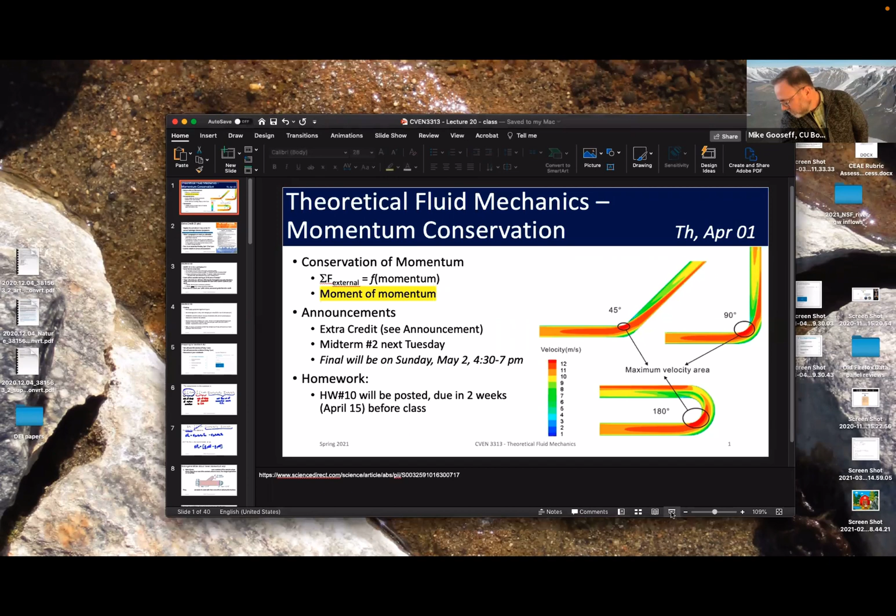Okay, so we're going to keep talking about linear momentum, the conservation of linear momentum, and then we will switch over to eventually talking about the conservation of the moments of momentum. So this is sort of getting into torque and stuff like that. We'll see if we get it started today, depends on how quickly we make it through the examples that I've got set up.

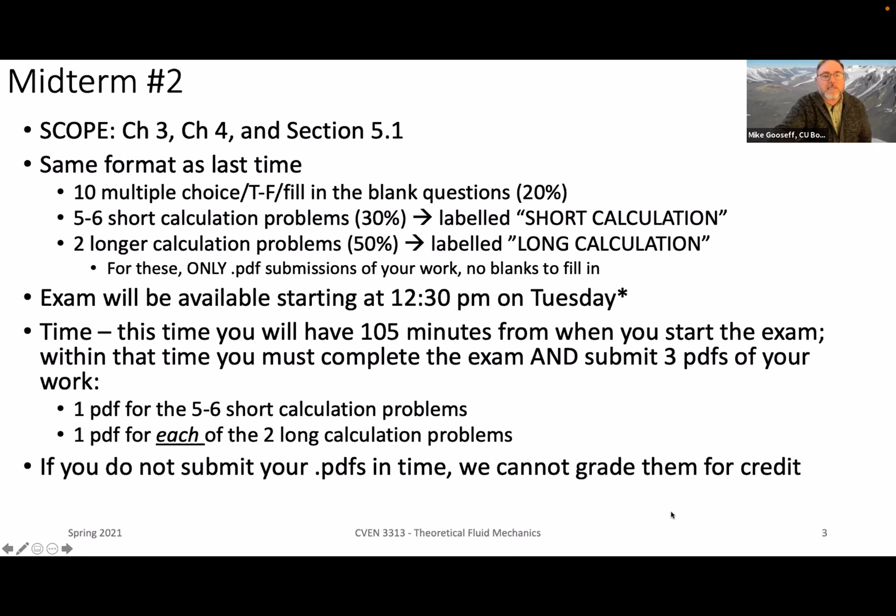So next slide then, grading. You must apply appropriate significant figures. We're going to be more stringent about that this time around.

We encourage you to carry units through your calculations, but that's not necessary—we won't take off if you don't, same as on the homework. However, if you get an incorrect answer because you didn't follow your units through, you'll lose points for the wrong answer, not extra points for missing units, but we may note that following units through could have helped. Just a heads up.

The work you provide needs to be orderly enough for us to follow your logic and process, but it's okay if you did something wrong, crossed it out, and kept moving. Please don't feel you need to take time to erase. We want you to be efficient with your time, but we also need to be able to review what you've done and follow your logic to see where things went wrong. Hopefully that saves you time.

This time we figured out how to hide the grades from you until grading is complete. Please don't worry about whatever number you see when you're done, because you may only see 20% of the exam score, since we have to hand grade about 70-80% of it—basically everything but those first 10 questions.

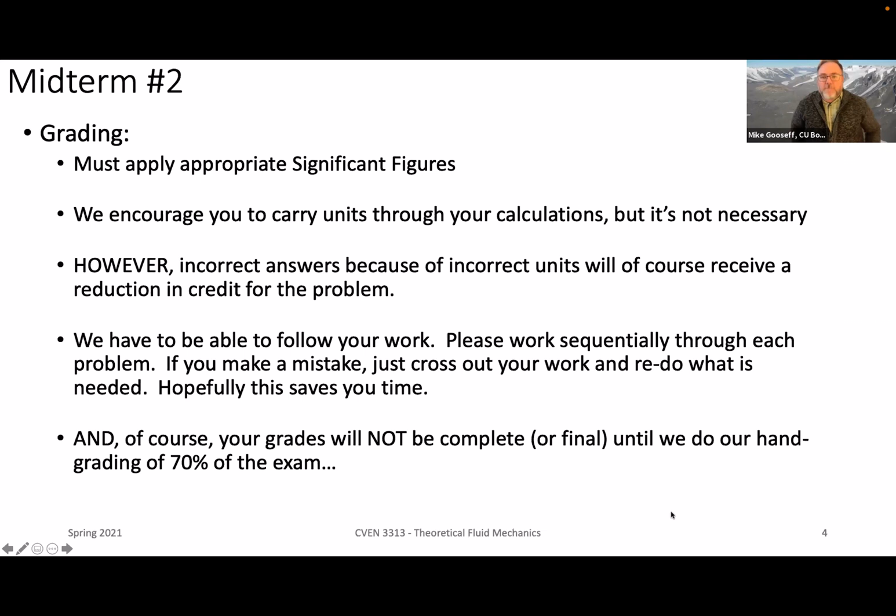All right, one last bit of information: how can you prepare for the exam? I'd recommend a couple of things.

I will post the solutions to all homeworks, including the one due today, by tomorrow at 5 p.m., so those will be available to you. Secondly, I'll post some practice problems tomorrow by 5 p.m. as well, much like we did last time.

Before I move on, I'll spend the recitation on Monday going over some of the longer problems in those practice problems. You can come with questions and we can have an exchange, but I can also just work out the problems I'm posting for tomorrow.

And finally, you've got a number of resources in your e-textbook. One of them is, when you're in a chapter reading—what the devil? Okay, sorry, this is weird. Oh, there we go. My pen was disappearing.

When you're in a chapter, on the left-hand side you can look at the library—it's kind of an index of everything in your book. You can go to these practice and homework problems, which are at the end of your chapter. Many have answers, and some have solutions worked out, so that can be a resource if you're stumped on how to solve a particular type of problem.

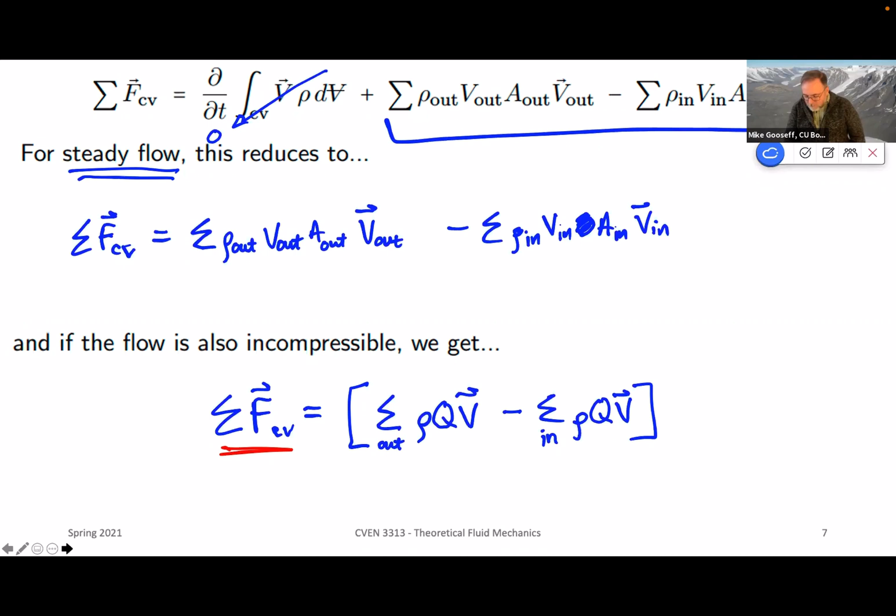Okay, so some generalities, rules, whatever, guidance—whatever you want to call this.

The first generality is when flow is uniformly distributed over a section of the control surface where flow into or out of the control volume occurs, the integral operations are simplified. What that means is that a particle here, a particle here, a particle here, they're all going at different velocity vector values.

This becomes more challenging to deal with than when all particles are going the same velocity, and our velocity vector is uniform across the cross section. So one-dimensional flows are easier to work with than non-uniform velocity distributions, and that's generally true for any problem. But with linear momentum in particular, it's quite helpful to have a single velocity vector representing the linear momentum at an inflow or outflow location.

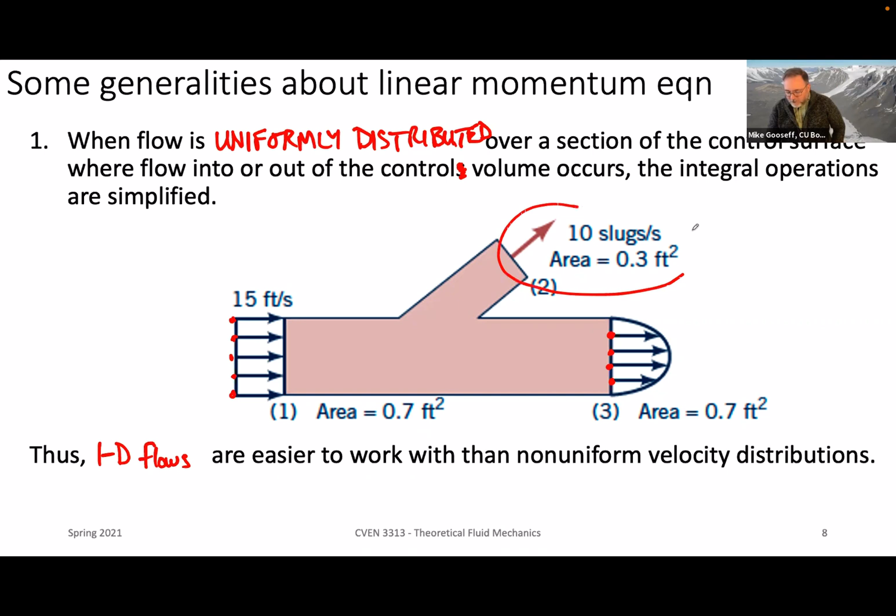It's interesting, we're actually given no information about this one. This was an example we looked at on Tuesday, or maybe last week, but in any event there was no information about it, so we assume we have uniform velocity across that cross section, leaving that location. So there's the first generality.

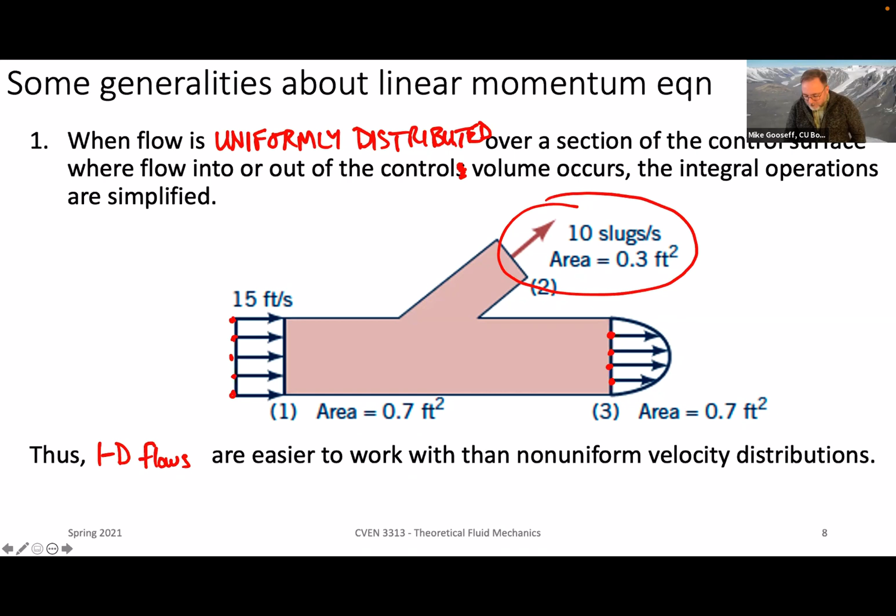The second one is that linear momentum is directional. It can have components in all three orthogonal coordinate directions. It can also be positive or negative depending on the particle's direction of travel.

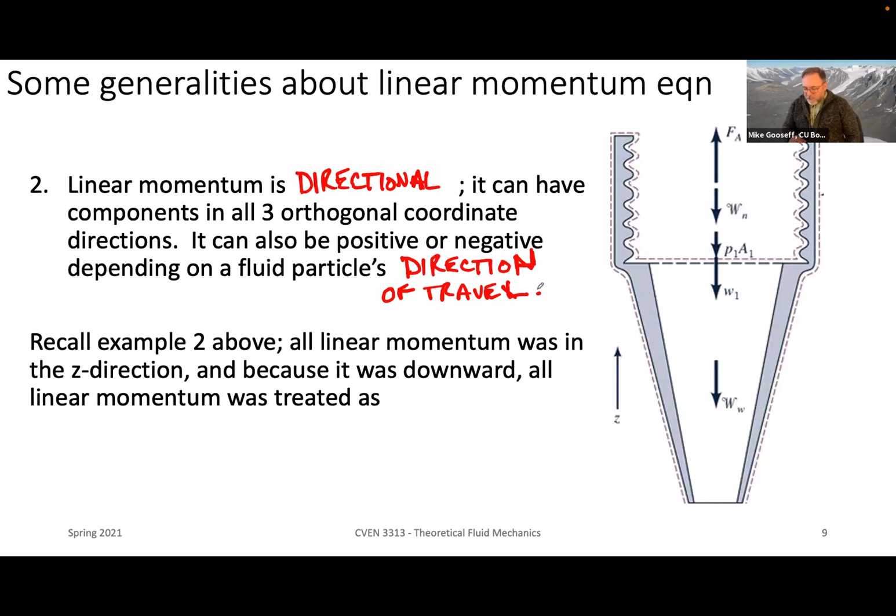Recall this nozzle problem that we worked on, example 2 on Tuesday. One of the things we talked about was that all of the flow was vertical, right? All of the velocities. So we have a W1 here, not shown here, but we had a W2 down here. Remember, those are going in the negative z direction.

So positive z is indicated to be upward, so any downward velocity is going in the negative z direction. Both W1 and W2 have different magnitudes, but they were going in the same direction, and they were both negative if we were summing or assessing momentum, linear momentum in the z direction. So all linear momentum was in the z direction, and because it was downward, both W1 and W2's linear momentum was treated as negative.

Now I'm saying that without putting it into the equation where we have to assess an inflow and an outflow of the control volume. This is just the direction of the linear momentum at the moment, at this particular junction.

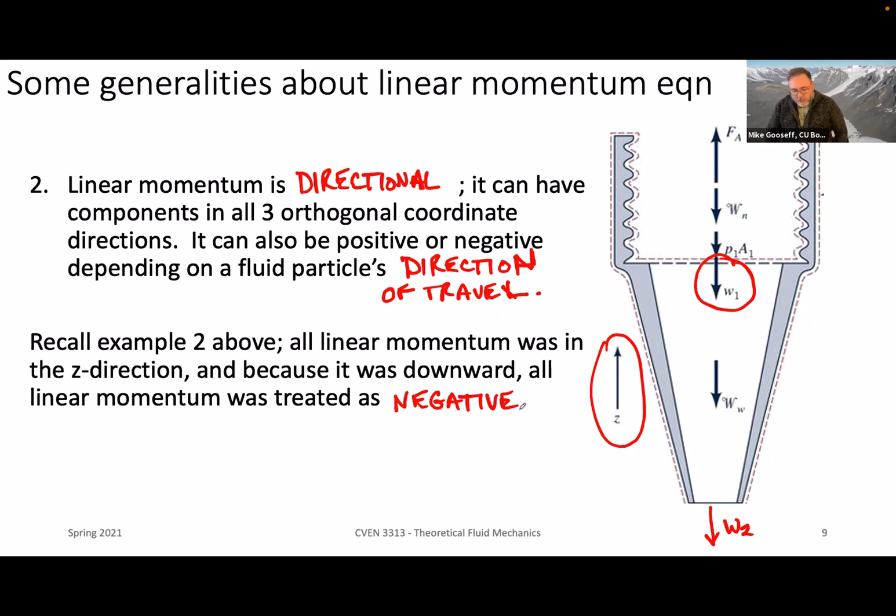Number 3, the next complication is that the flow of linear momentum into a control volume involves a negative V dot n hat dA. Remember, this is what we're integrating in that second term on the right-hand side of the Reynolds transport theorem that includes linear momentum. This piece will have a direction for V and a direction for n, for our n hat.

So the flow of linear momentum into a control volume involves a negative V dot n hat dA, and the flow out of a control volume involves a positive V dot n hat dA. And then we've got the velocity vector outside of that in its own direction. So note there are two signs to keep track of: the direction of the velocity vector, positive or negative, and whether the momentum is into (negative) or out of (positive) the control volume. We'll go through one or two examples of that in coming slides.

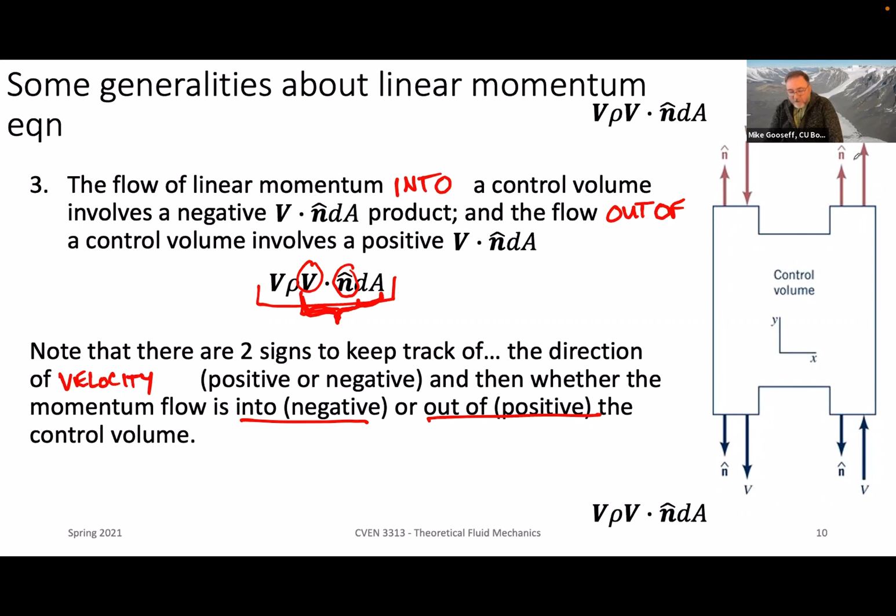So let's look at these four different cases right here. We have an inflow here, and of course our n hat is out, and then we have an outflow here of the control volume. On this upper end, n hat dA will be negative since it's an inflow, but V is going in the downward direction. As long as we think of Y as positive upward, two negatives multiplied together give us a positive here. On the other side, velocity is going in the positive y direction, and because this is an outflow, it will be positive as well, so this ends up also being positive.

For the same reason, but reversed, because it's an outflow and happens to be going upward in the y direction. Now what about these two down here? We have an outflow where V is going downward in the y direction, so that would be negative. Because it's an outflow and we're going with n hat, we would have a negative value down here.

Over on the right-hand side, this lower right-hand corner, now we have velocity going in a positive direction. And because that's an inflow, we know that should be negative, right? So we have a velocity going in the positive y direction, but because it's an inflow to the control volume, this is also negative. A negative times a positive gives us a negative.

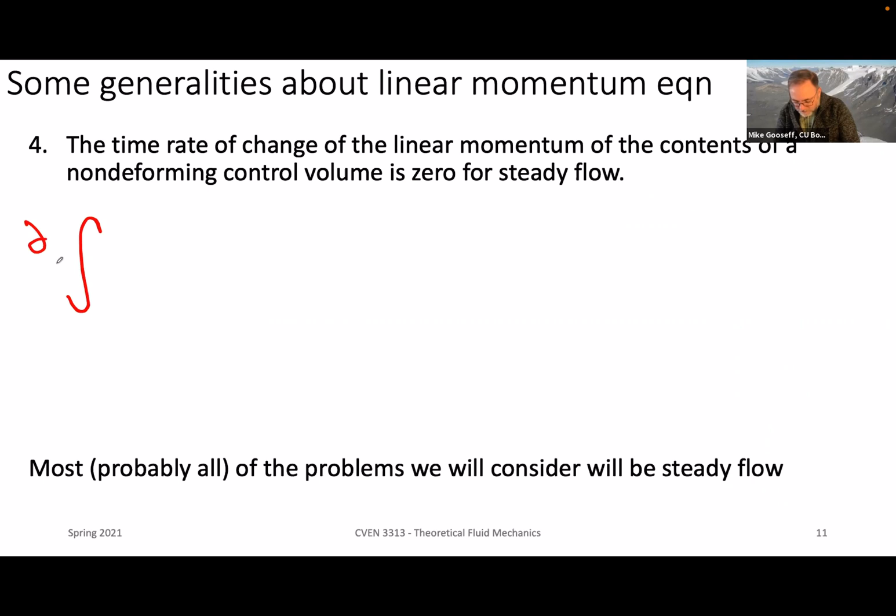Number 4: the time rate of change of the linear momentum of the contents of a non-deforming control volume is 0 for steady flow. In other words, the first term on the right-hand side of our Reynolds transport equation, del over del T of the integral over the control volume of V rho dV, where that's volume. There are two ways to look at this. We can say that the rate of change of this linear momentum of the contents of our control volume is 0 when we have steady flow.

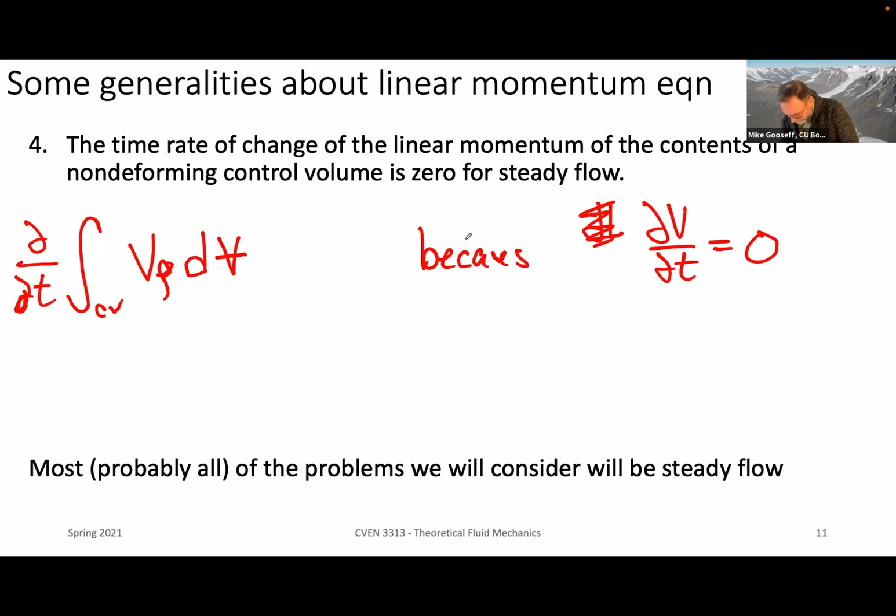Now that steady flow could mean two things. The first is that del V del T is equal to 0, because it's steady flow, it's not changing in time. I would also argue that the other thing that occurs here is that del rho del T is also equal to 0 if we have steady flow.

So we can kind of think of it as steady mass flow. But assuming, for example, we're only putting water through a system and that all the water has the same density, then we can just focus on the steady flow part, the velocity component with no change in time, so del V del T being equal to 0. Most, if not all, problems in this class will be steady flow.

The one exception was, I guess it was steady flow, but you were still accumulating water, that reservoir problem in the homework due today. That one did have a change in storage because it wasn't a fixed, non-deforming control volume. As a reservoir, it can rise and fall its level, and so it could store water if that's our control volume, the reservoir itself.

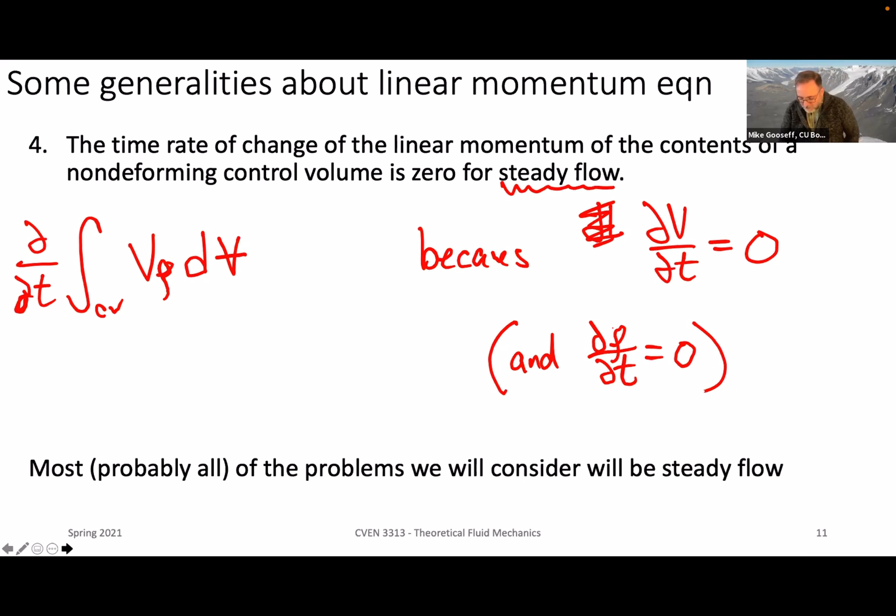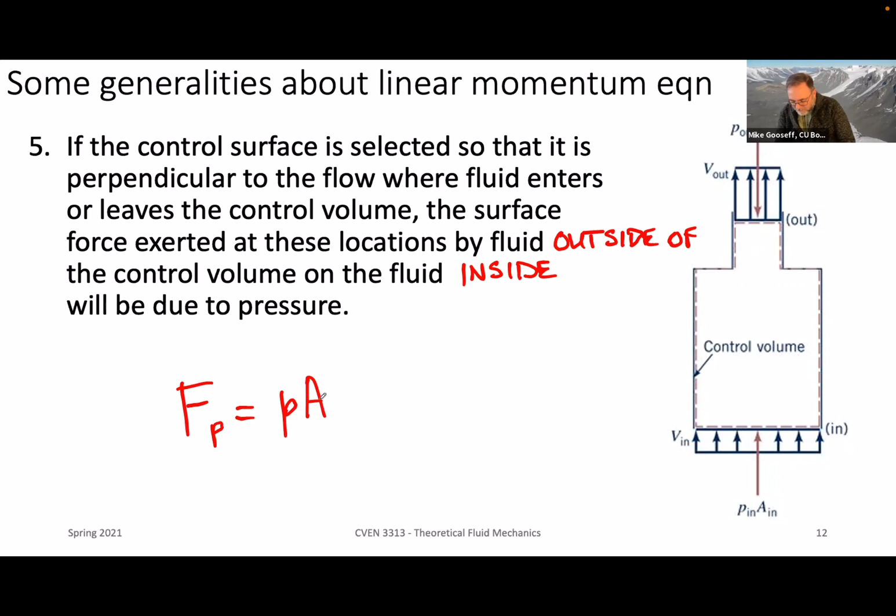Okay, so that's number 4. Number 5: if the control surface is selected so that it is perpendicular to the flow where fluid enters or leaves the control volume, the surface force exerted at those locations by the fluid outside of the control volume on the fluid inside the control volume will be due to pressure. In other words, we have to consider pressure force, equal to P times some cross-sectional area, where that occurs. So P-out times A-out is a force acting on this edge of the control volume, and P-in times A-in is a force acting on this control volume at the inflow.

So we can't forget our hydrostatics essentially. Somebody asked about whether we were going to have hydrostatics covered in midterm 2. Not really, but sometimes the concepts come through. We can't ignore them completely.

Number 6, the external forces have an algebra— Professor, do you mind going back just for a little bit? That one? Yeah, okay, sure.

In this case, all the flow is upward, coming from the bottom, going up out the top. P-out times A-out might be 0 if this was a free jet of some sort, but we don't have any information about that. So assuming there's some column of fluid above the outflow, and often, as you saw in the homework, you'd get a pressure value given at the inflow and outflow. Those are useful to us to make these particular calculations to get these forces. All right, am I okay to go on?

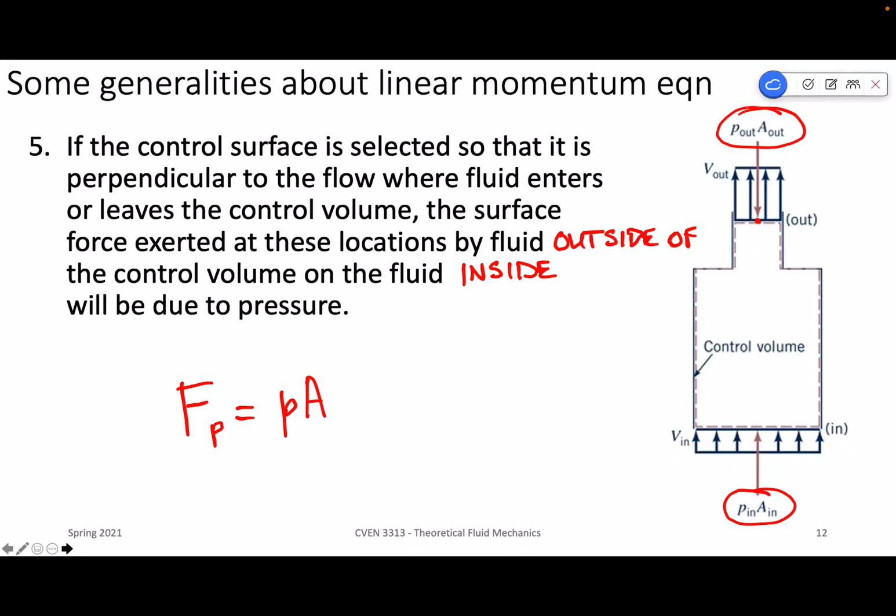Okay, number 6: the external forces have an algebraic sign, positive if the force is in the assigned positive coordinate direction, and negative otherwise.

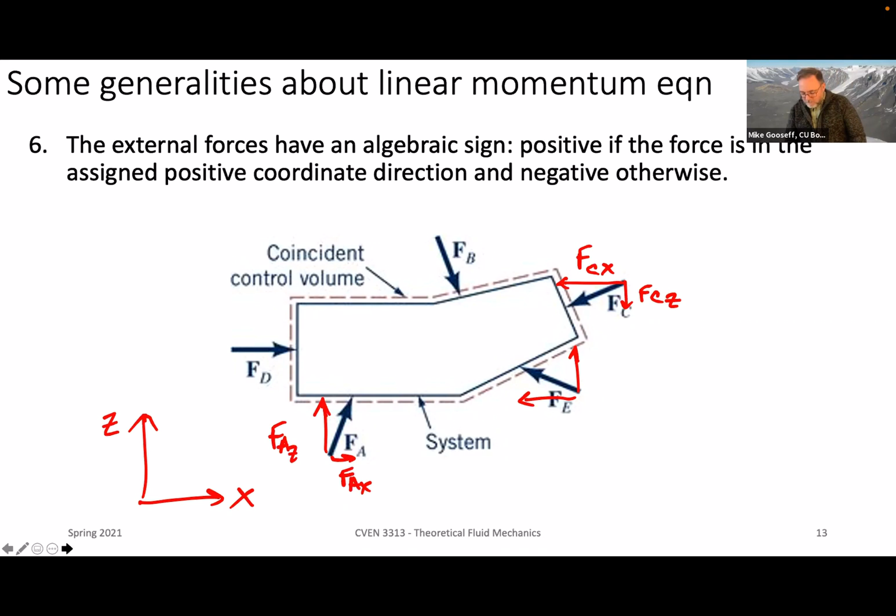Okay, that's number 6. I've got one more, and then we'll go through the U-turn 180-degree example together. So number 7 is that the force required to anchor an object is a function of generally 3 things: 1, the surface pressure and shear forces acting on the control surface. 2, the change in linear momentum through the control volume. And 3, the weight of the object and the fluid contained in the control volume.

So when we went through this example on the right-hand side here on Tuesday, remember these two components - there was the weight of the water, and I think we called it WN, the weight of the nozzle. Those two were really small. It was important to still calculate them because they were vertical forces included in the system, but they just happened to be quite small in the overall scheme of things. I think the pressure forces might have been the biggest, and then the linear momentum was next. But those were much larger in both cases than the two weights. So just a heads up, you can't discount them completely, but from a magnitude perspective, they tend to be fairly small. Now, that was for that particular example. Of course, we could have other types of examples where those would be much more appreciable potentially.

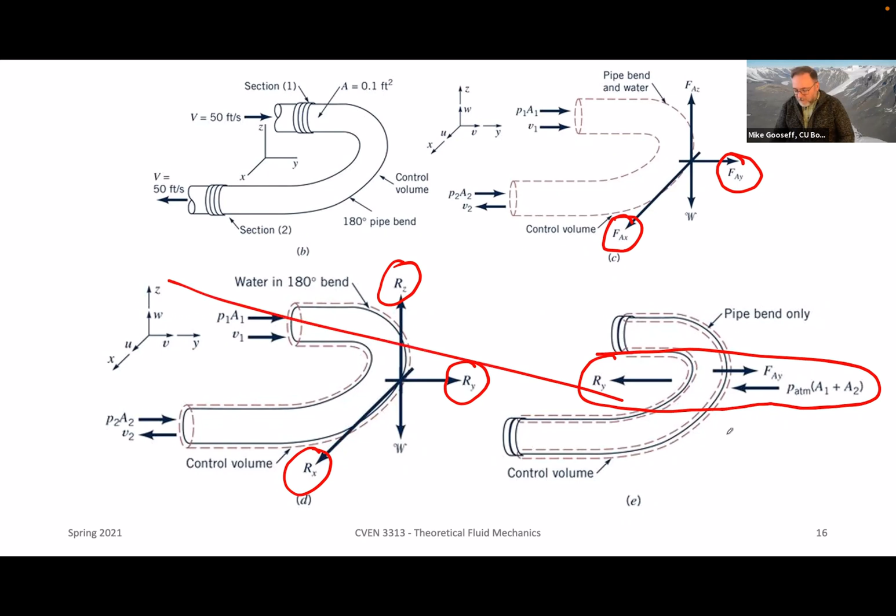And then finally, on the lower right here, if we just look at these in the Y direction, if you were going to solve for RY, you would expect it acting in the left direction. FAY is probably also going to be acting in the left direction, and then your atmospheric pressure component would have a role here too. But for now, let's not worry about all this stuff—let's just focus on figuring out this FAY component.

So for the sake of completeness, I am going to show the X direction here real quick. The sum of the forces in the X direction are equal to, in this case, just FAX—the only force acting in the X direction—and that is going to be equal to this integral over the control surface of our linear momentum: U times rho times V dot n hat dA.

We note U1 is equal to 0, and U2, the outflow, is also equal to 0. So ultimately we can say that FAX—I could take the time to write out an m dot times V on the right-hand side and break this into the inflow and outflow, but I'm going to skip that and just note that because the U's are equal to 0, there's no velocity in the X direction, so FAX is equal to 0 as well.

Okay, so that's the complete aspect of dealing with this particular problem. And by the way, I can't remember exactly what number it is, but this is a fully worked out example in your e-book as well, your e-textbook. Okay, this gets more complicated for the Y direction.

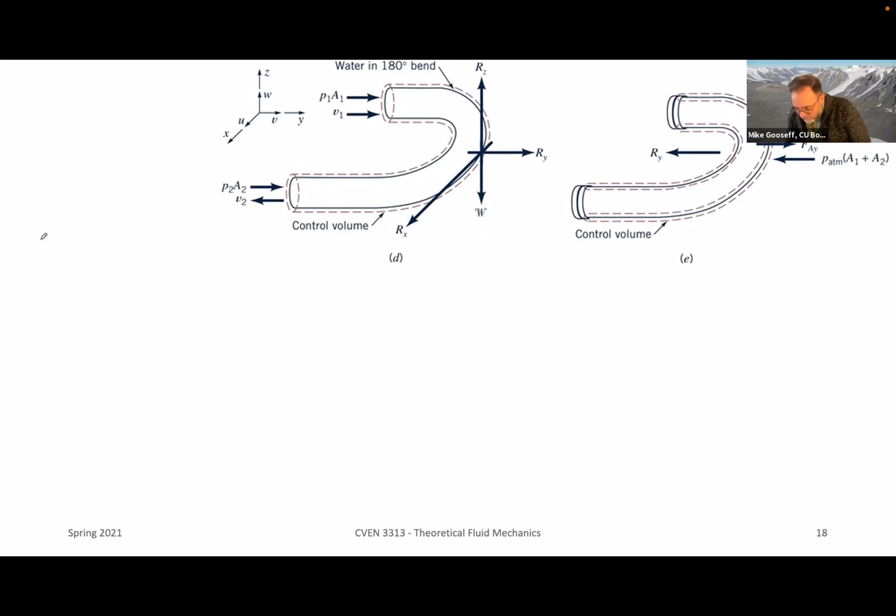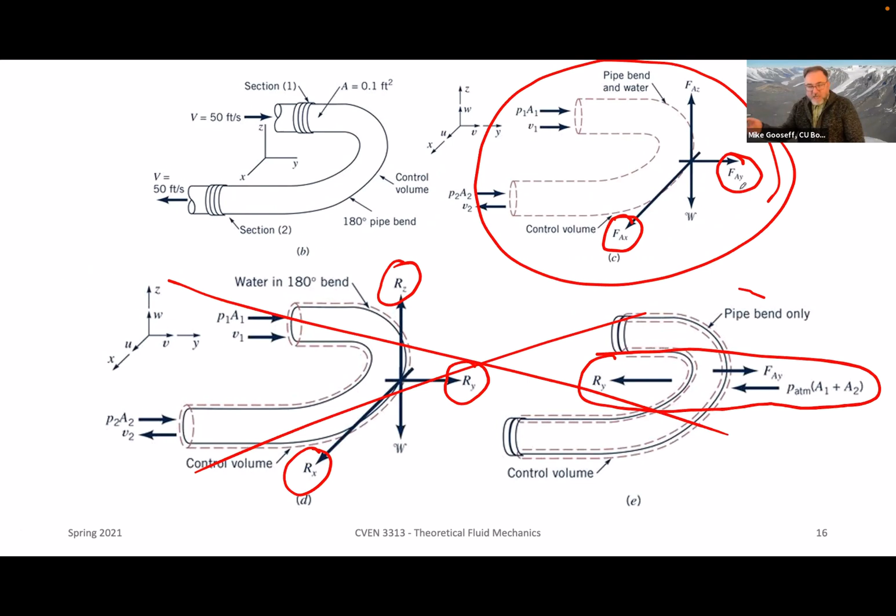So similarly, we can start with the sum of the forces in the Y direction equal to basically FAY—oh, I copied the wrong one here. Anyway, real quick, let me just show you. I meant to keep this one, but FAY, because it's been drawn in the positive Y direction, I'm going to keep it that way. If I had drawn this myself, I probably would have drawn it negative and then put the negative sign in front, but if we end up with a negative, we'll know it's going in the opposite direction.

So FAY, and this is equal to our change in linear momentum—the integral over the control surface of the flow of linear momentum, V times rho times V dot n hat dA.

Okay, so we can now break this integral into two pieces. We are going to look at the inflow of the linear momentum and the outflow. So the left-hand side is... actually, I forgot two forces. I forgot about my pressure forces. Let me redo this. I'm going to add these on to the end instead. So it's incorrect to just say it's FAY. It's FAY acting in the positive Y direction, plus P1A1, plus P2A2. So you might be wondering, why are both of those positive?

The reason they're positive is that the control volume we've drawn has a face on this side and this side, right? Those are vertical faces, and the pressure is always acting normal to our control surface. In this case, they're both acting in the positive Y direction, so that's why they're drawn this way in both cases. Those are our pressure forces we have to account for as well.

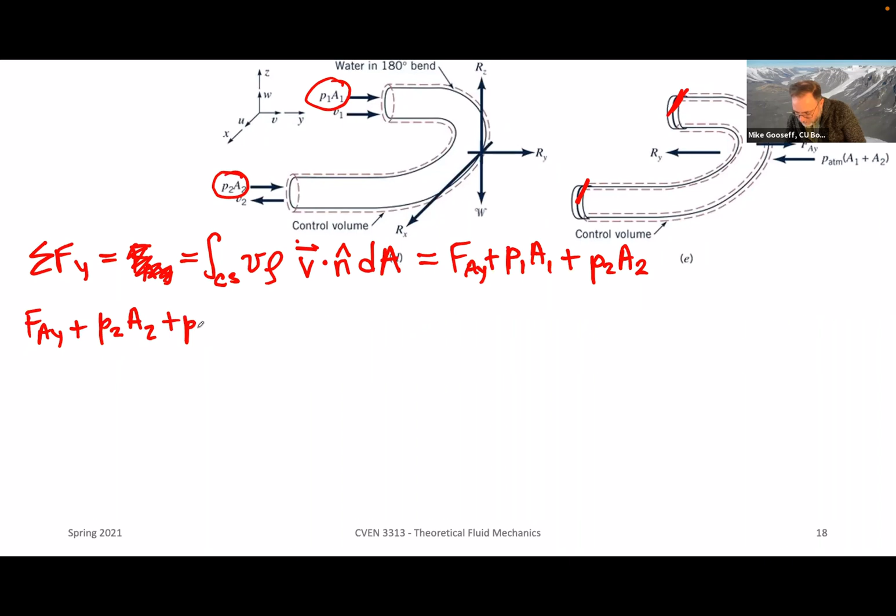All right, so now let's rewrite this. This should be AY, so FAY plus P2A2 plus P1A1 is equal to... remember, when we go to linear momentum, we're basically multiplying a velocity occurring in the Y direction, at both the inflow and outflow, by an m dot, a mass flow rate. So on the inflow side, we will have a plus V1 and a minus m dot 1.

So why is that negative? Because we said that the inflows, basically V times n hat dA, the inflows are negative, okay? So that's where the negative comes from for the mass flow rate. The velocity is acting in the positive Y direction, so it has a plus sign.

And then we're going to add what happens on the outflow as well. The outflow has V2 acting in the negative direction, and it has a plus m dot 2 occurring there as well. Remember, the outflow is a positive V times n hat dA, so that's where the positive comes from on m dot 2. The velocity V2 is acting in the negative Y direction, so it gets a negative in front of it.

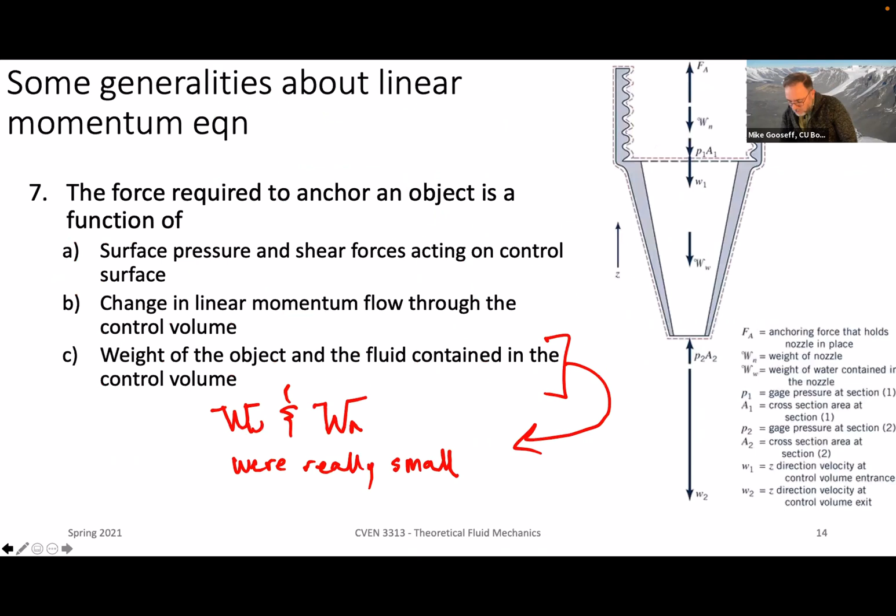Could you go over again how to decide the sign of momentum based on the direction of the arrow, whether it's going in or out, and why the M dots are the way they are? There are two ways that you can change the sign of momentum.

The master fundamental equation tells us that outflows have a positive sign and inflows have a negative sign. So when I put that positive and negative in front of the M dot in the problem, that's where these signs are assigned based on whether it's an inflow or an outflow. Outflows are positive, inflows are negative.

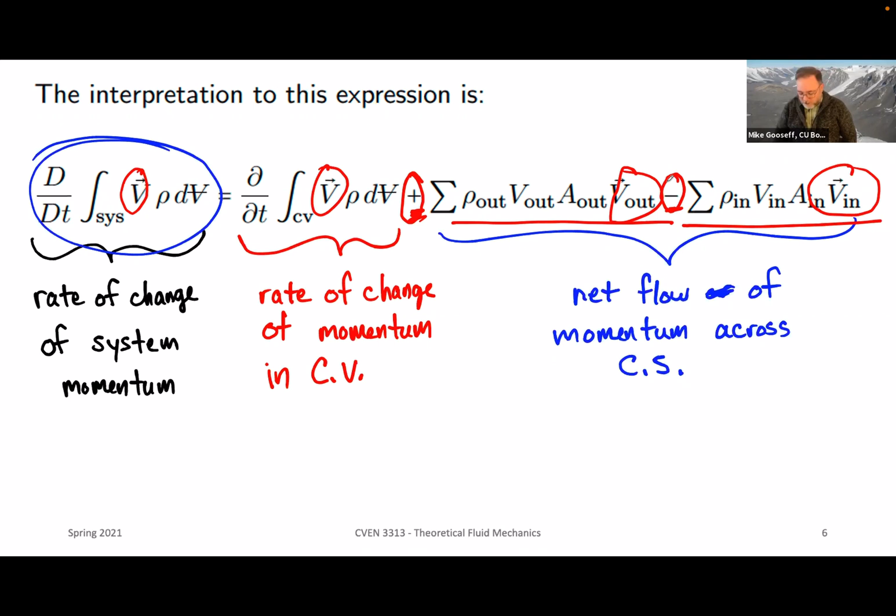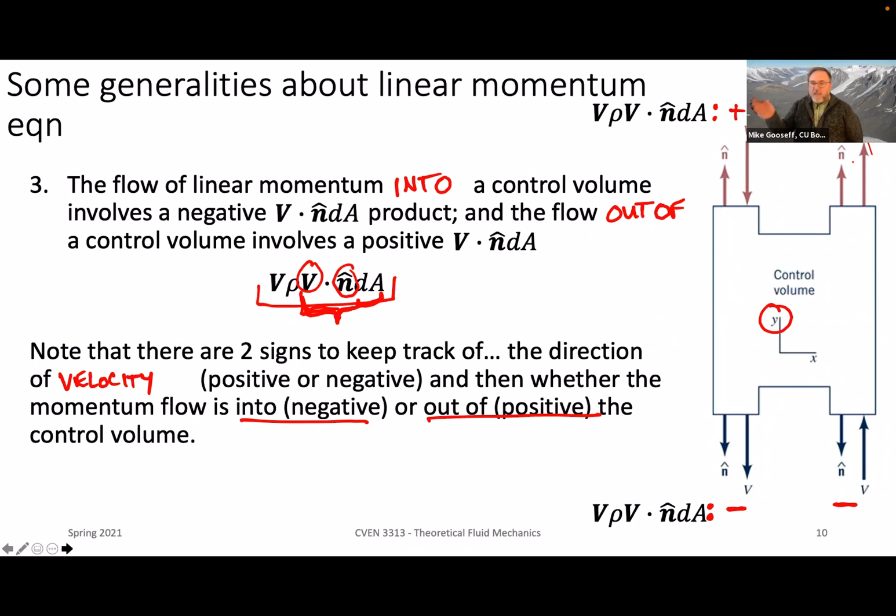That was part of this generality, number 3 here. Inflow and outflow give you plus or minus for which direction you're going for the M dot, but then the velocity will also have its own direction. So in this case, M dot 1 got a negative because that's an inflow, and it got a positive on the outflow end. M dot 2 is positive because that's an outflow. That comes from the Reynolds transport theorem.

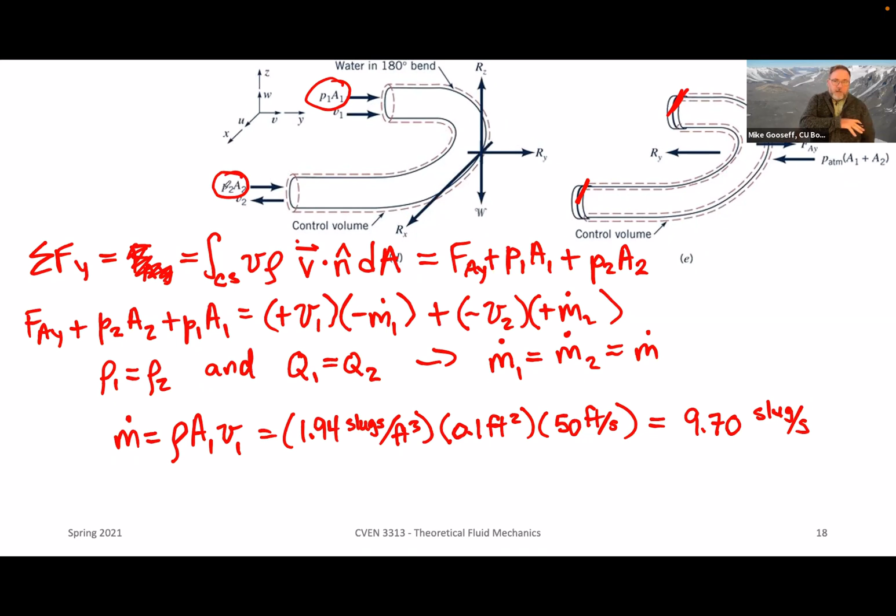Then these velocities are either going in the positive or negative direction. V1 is acting in the positive y direction, so it is plus, and V2 is going in the negative y direction, so it gets a negative. Hope that helps.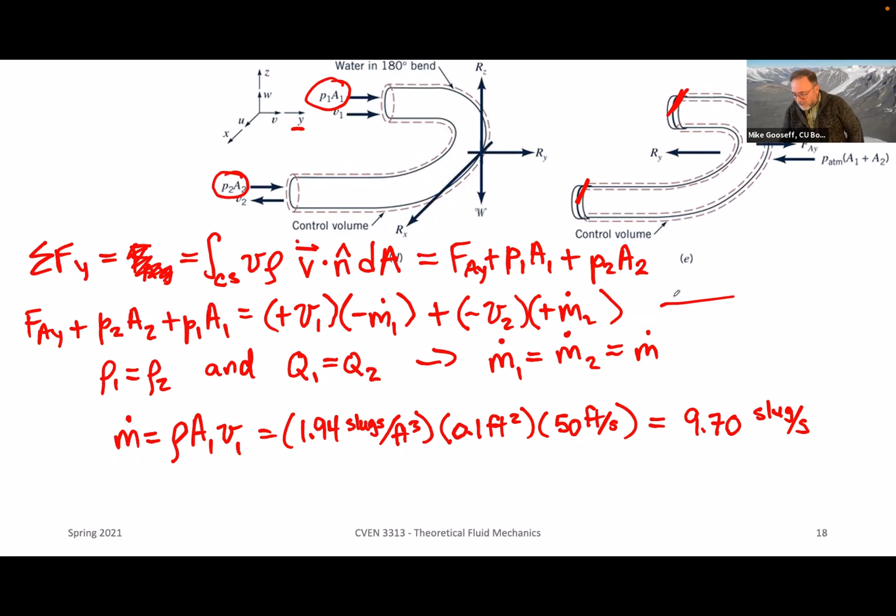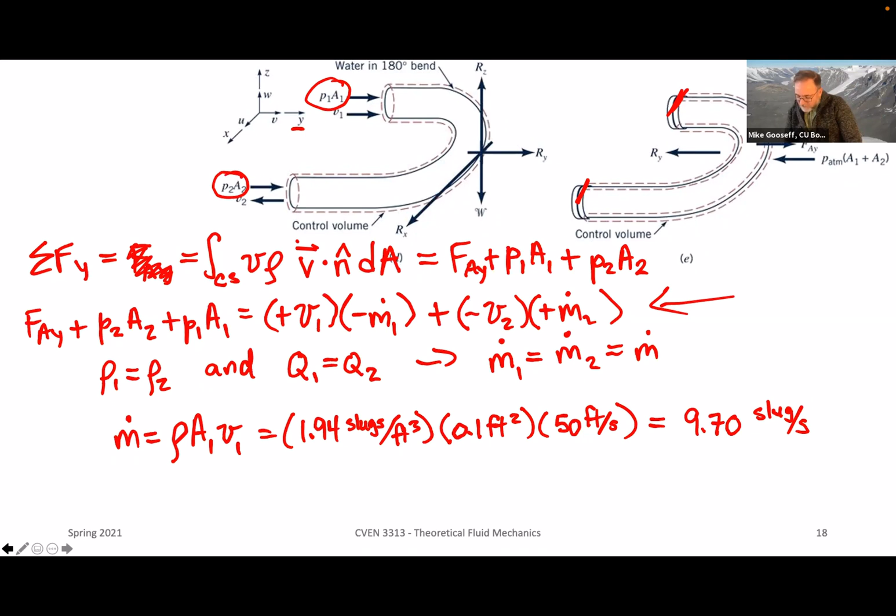On the next slide, we're going to put all the numbers in for this equation to calculate this anchor force, the y direction component of the anchor force. So FAY is equal to... hang on, did I drop that negative? Oh, I know, yeah, okay, sorry, maybe I need to take one more step. Let's rearrange that equation so that we isolate FAY on the left-hand side.

So if I do that, I have FAY is equal to minus M dot times V1 plus little v2, minus P1A1 minus P2A2, and then I think that's it. So all we did was rearrange the equation on the previous slide algebraically.

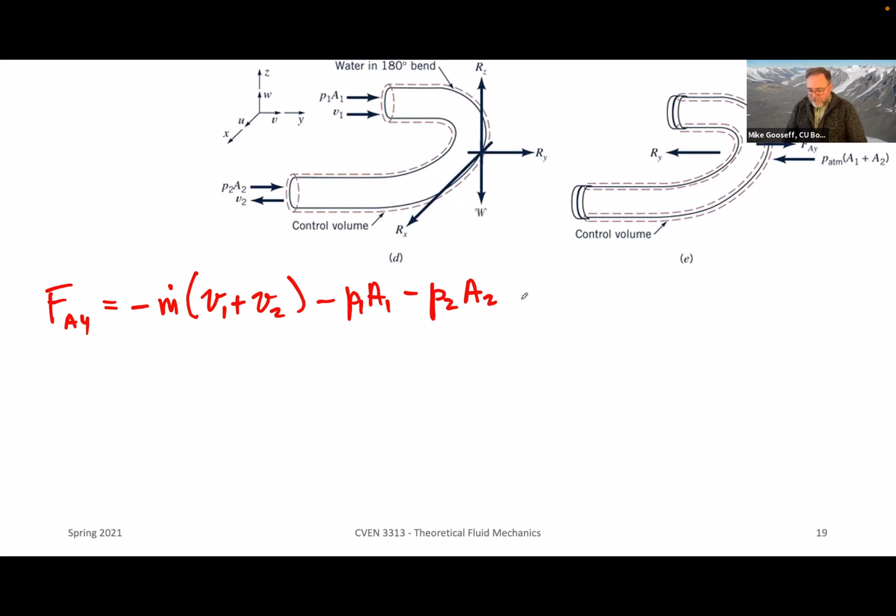Now we can plug and chug through to get our numbers. This would be equal to a negative 9.70 slugs per second, multiplied by this sum of the two V's. It turns out they're both the same value, so I'm just going to have 50 feet per second plus 50 feet per second.

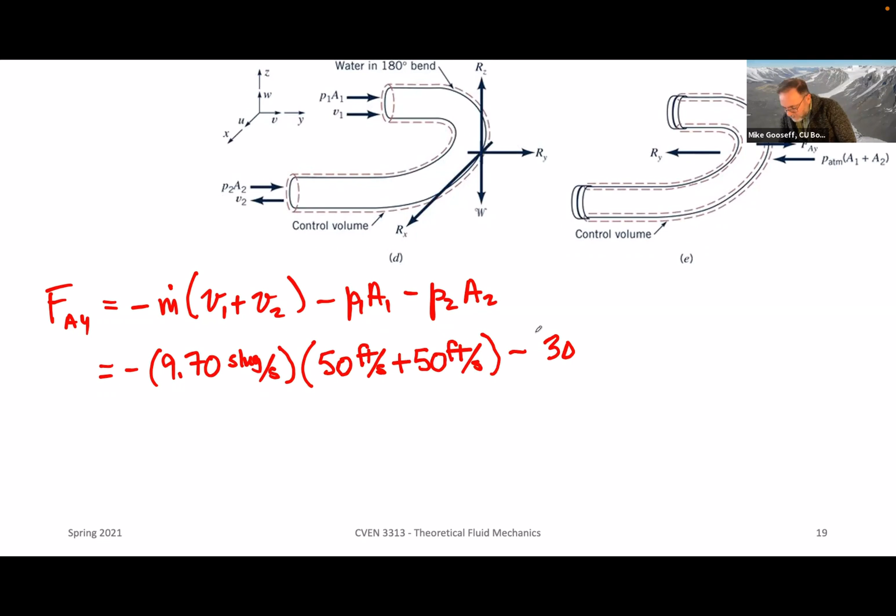And then I subtract P1A1. So this would be 30 pounds per square inch, so I need to convert that to pounds per square foot. I'll multiply by 144 inches squared per foot squared, and then I multiply by the area, which is 0.1 square feet.

Then I have to subtract P2A2, which is now, instead of 30 PSI, 24 pounds per square inch, times 144 square inches per foot squared, and then multiplied by our area again, same number, 0.1 feet squared.

When we work all this out, we end up with FAY being a value of minus 1,748 pounds of force. Before I take this a step further, one thing about that is because it came out negative, FAY is actually acting in the opposite direction from the way that we wrote it in our equation.

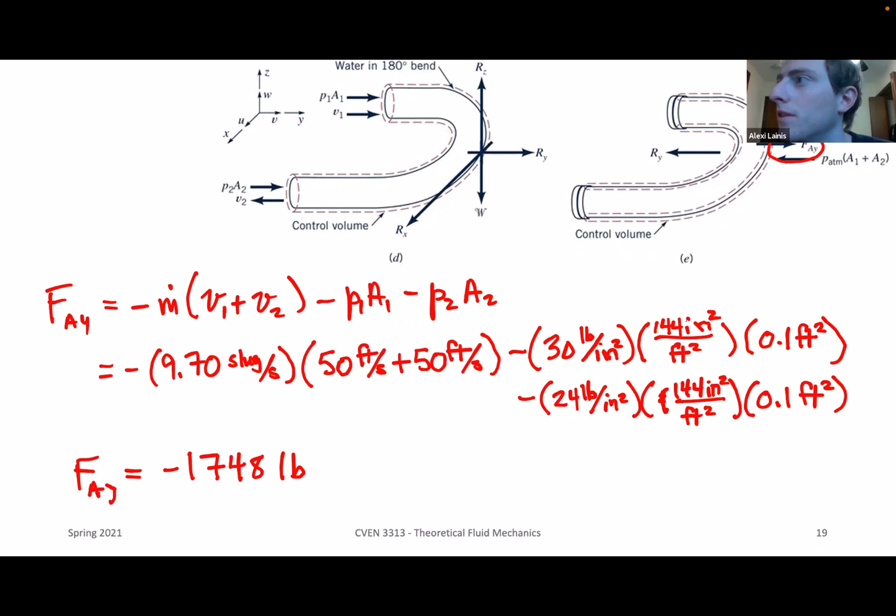Someone has a question in the chat. Since we are given pressure in PSI, do we need to adjust it somehow? Usually we work with gauge pressures. Oh, PSI-A, right, the A was absolute.

Good question. In this case, you don't have to. It's a closed system, and we're not somehow interacting with the atmosphere. So all we really care about ultimately comes down to a pressure change from one point to the next, so you can work with the absolute value given.

If we had put these in gauge, they would be big time negative, I guess, right? Because they'd end up being really small pressure values, or very negative - large negative values is actually what they'd be. So yeah, good question, thanks for asking that.

Okay, terrific. All right, we're going to do something a little bit different on this one.

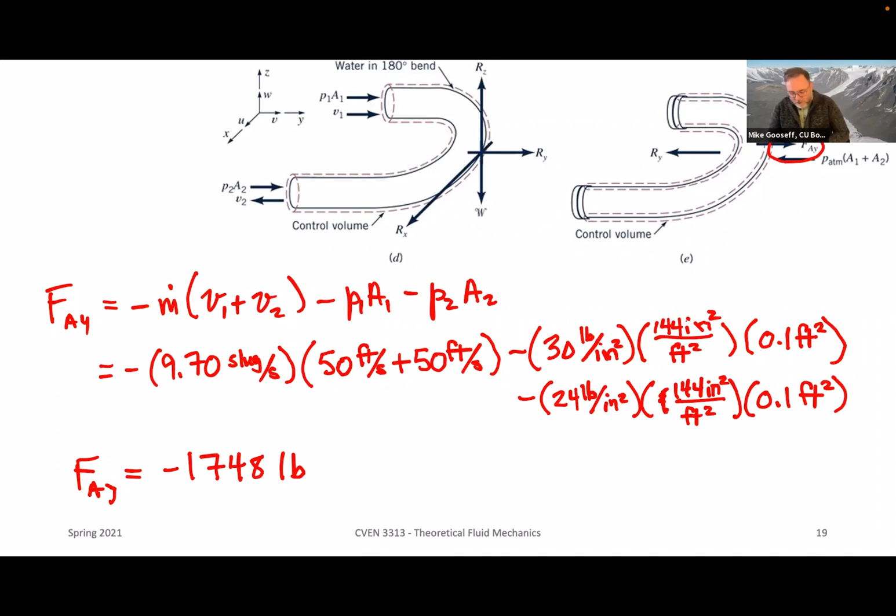I want to walk you guys through it, but then I want to break you guys into groups and just have you work on one piece of this, only one piece. And then we'll work the whole thing together.

So here is a sluice gate on the right-hand side. You can see two versions of it: one is when it's closed and there's no water coming out, and then when it opens up a little bit, it's got water coming out of it. We're given some dimensions on the left-hand side. The width of this thing into the screen is 1 foot, so we're going to start with this and just consider what we call unit width.

So per unit width, what is the force that we need to keep the sluice gate in place?

U1 is going to be a velocity when the sluice gate is open. On the left-hand side, this would be U1 coming in, an inlet velocity of 4 feet per second when the gate is open. And U2 down here is going to be some sort of exit velocity.

You can see that H, the total height—this isn't quite drawn to scale—because big H is 6 feet of water behind the sluice gate. And the sluice gate, when it's open, we have little h equal to 4 feet. So that looks more like 4 inches compared to 6 feet, but anyway, you can imagine it opening to about 2/3 of the height here.

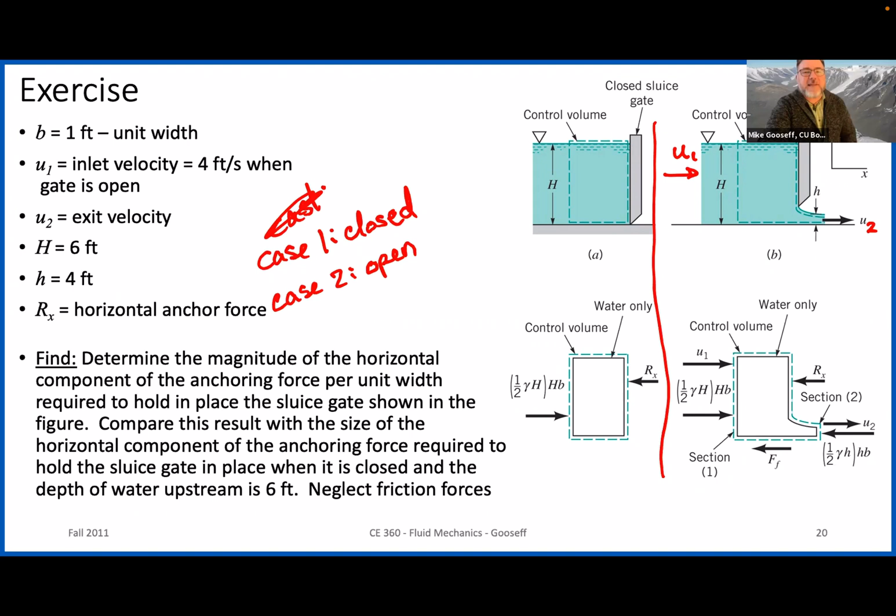So Emma, it looks like you're not working from your phone anymore. Yeah, I've upgraded, I'm now on an iPad. Oh okay, yeah, soon I'll be back on the computer and I won't be bigger - looking down on one, but slightly bigger surface. Yes. Are you still in Arizona? No, I'm back home. I just have to get all stuff - my computer's struggling a little.

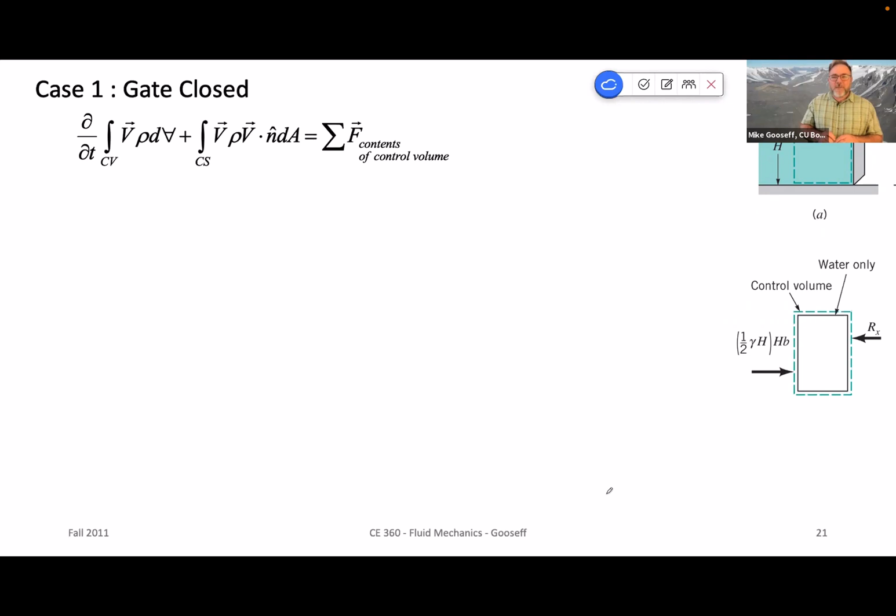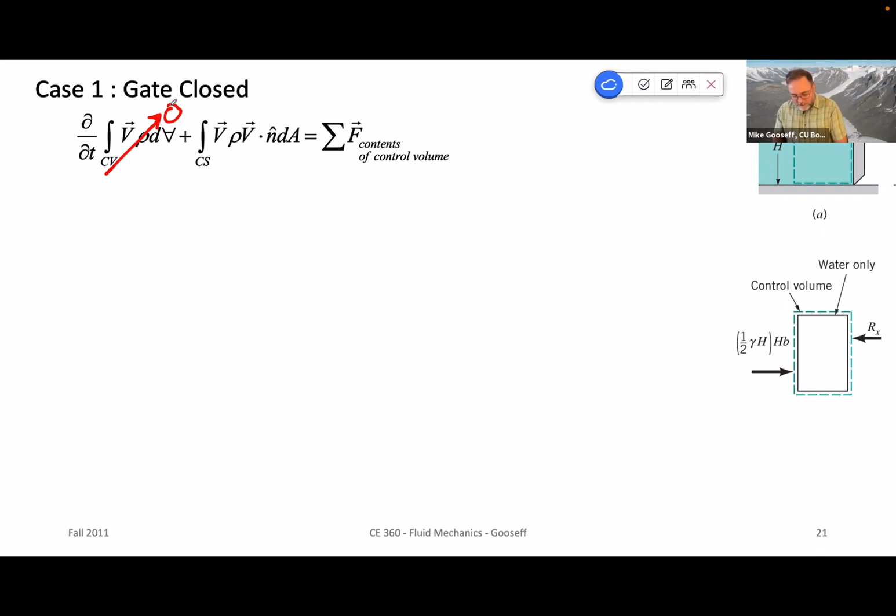Now, the closed sluice gate is basically the condition, the example we had from several weeks ago. This was basic hydrostatics. When the sluice gate is closed, there's no change in time, and as it turns out, there's no linear momentum. There's no velocity occurring anywhere for the closed gate condition. So we have to note that the sum of the forces in the x direction equals 0.

So we end up going back to fluid statics. We would have our hydrostatic pressure acting on this side, and then some reaction force holding that in place. Now, we're not going to worry about its location, we're only going to worry about its magnitude at the moment.

So the hydrostatic force on the left-hand side is gamma water, the specific weight of water, times its acting value. We multiply by h/2 to get to the middle, then multiply by the area of the sluice gate, and we were given a width of B. It's acting over all of H and B wide.

And the other force acting here is just Rx acting in the opposite direction. So this is Rx, and the other is our hydrostatic force. These are going to equal 0, so we can solve for Rx, being equal to 62.4 pounds per cubic foot.

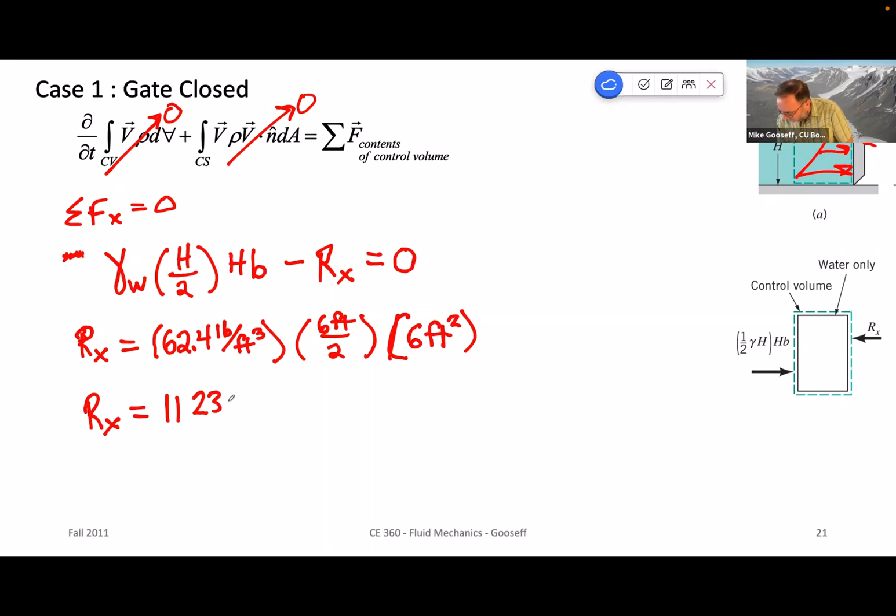And so when we do this math, Rx comes out to be 1,123 pounds. Okay, so this is basically our force balance here that is acting in the X direction.

Okay, so that makes sense, we kind of went back to basics. Now what happens when the gate is open? We're still going to have a force, the hydrostatic force acting on the top part of the gate that is still in contact with the water.

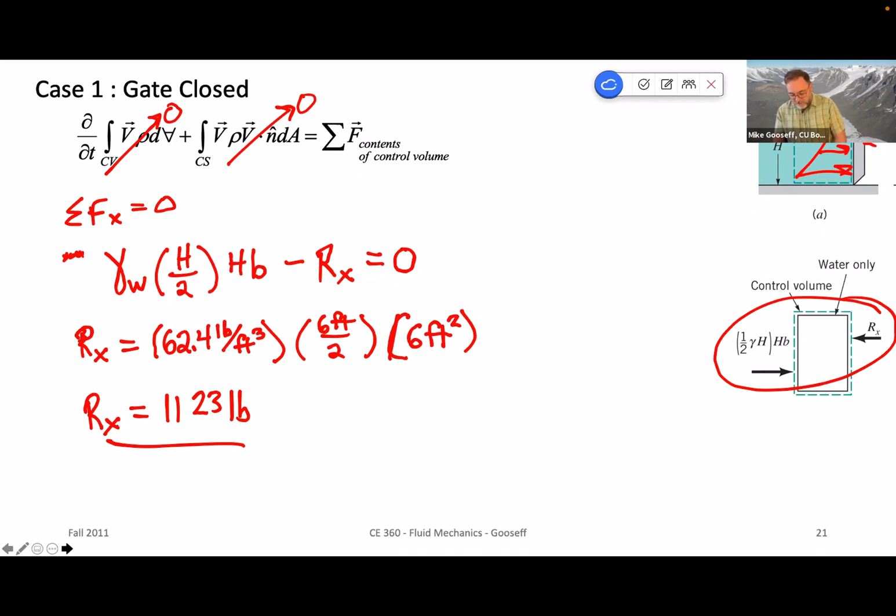But we also have to account for the linear momentum change through the system, or through our control volume rather. So in this case, we're going to have no change in what's stored, but we will have to deal with this component. And on the right-hand side, we'll also have hydrostatic force included here. So now let's see, I want to do this in the right direction here.

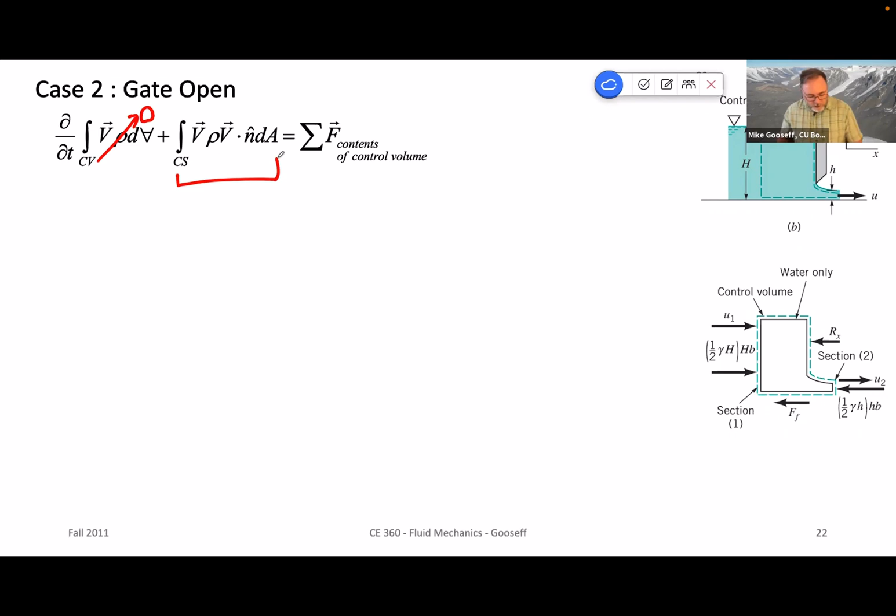Okay, for the gate open case, am I missing something? Okay, all right, this feels a little bit odd. Okay, there it is. Okay, so let's just work the sum of the forces.

We're going to have to include hydrostatics and stuff. Let's leave that alone for a second and just work with the linear momentum part on the right-hand side real quick. So these are these external forces, we're going to leave that alone. And on the right-hand side, when we're just dealing with this integral piece, we're going to deal with the incoming linear momentum.

So when it's coming in to our control volume, remember that it is a minus m dot 1. But the u, the velocity, is acting in the positive x direction, right? So there's x being positive. So this is a u1 times a minus m dot 1. And then we're going to add to that what happens at the outflow. And in this case, the outflow is also in the positive x direction. So u2 times, and then because it's an outflow, it's positive, our mass flux is positive, m dot 2, okay?

So now we need to figure out what U2, we're given U1, what is U2 and what is m dot? So this can boil down to, we note that...

M1, during this condition, m dot 1 is equal to m dot 2. We're not given any information about a rise or fall or anything, so any of the water coming in on the left-hand side has to be coming out on the right-hand side. So we're just going to call that m dot.

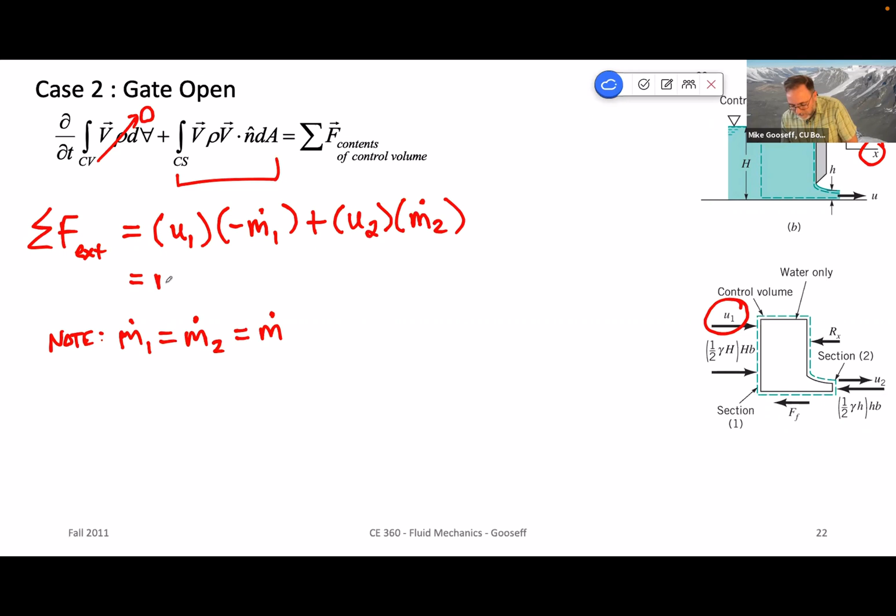And we can now rewrite this upper equation to just be m dot times U2 minus U1. Okay, so all I did was transfer that negative term and then group these.

Also, we note that Q1 is equal to Q2, so the flow rates are going to be identical here as well. And when that occurs, we can say that U1A1, that's the flow rate into 1 on the left-hand side, is equal to U2A2, the flow out on the right-hand side.

So let's just solve for U2 first. U2 is equal to U1A1 over A2, right? And that's equal to 4 feet per second times A1, which is H times 1, big H times 1, so that's 6 square feet.

So I'm just going to save us the scribbling, 6 feet squared divided by A2, which is 4 feet squared. So it's little h, 4 feet tall and 1 foot wide. I'm just doing that multiplication to save us from me scribbling out a 1. So when we do this math real quick, we just get 6 feet per second for U2.

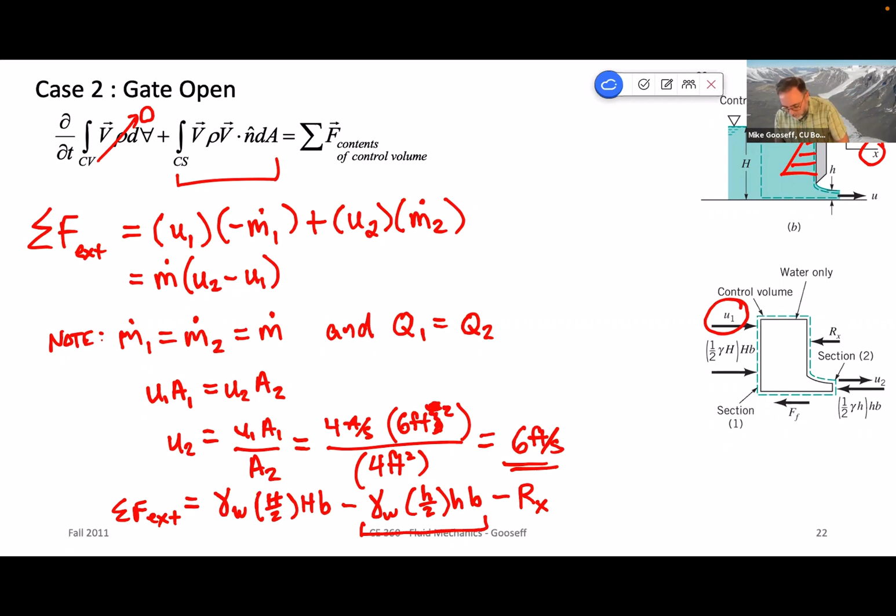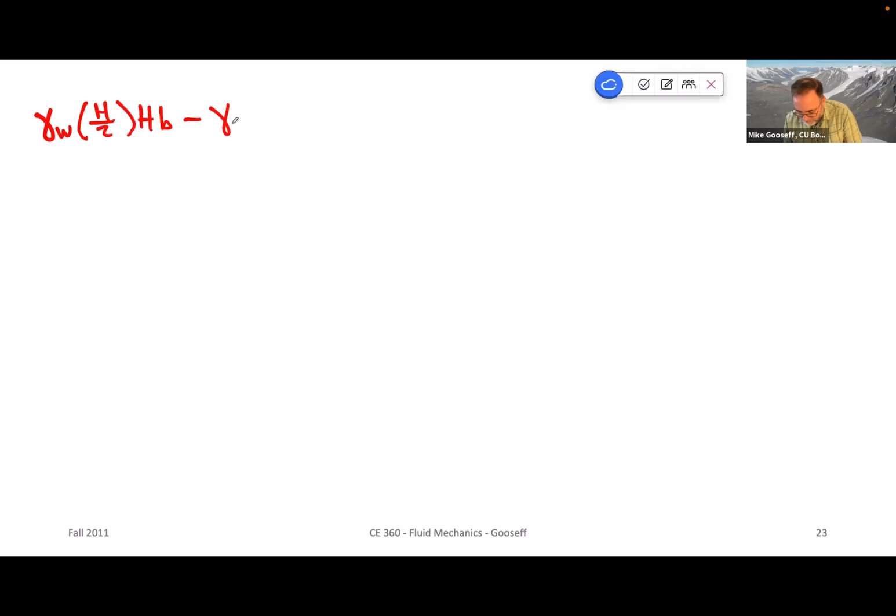So the last thing here then is gamma W times big H over 2 times H times B, minus gamma W times little h over 2 times the cross-sectional area h times b, minus Rx, equals m dot times U2 minus U1. We can solve all of this, taking two steps here.

Rx moving to the left-hand side, then substituting in all these values, we end up with 62.4 pounds per cubic foot times 3 feet, which is big H over 2, times the area of big H, 6 feet squared, and then minus 62.4... 624. 62.4 pounds per foot cubed times 2 feet, little h over 2, times 4 square feet.

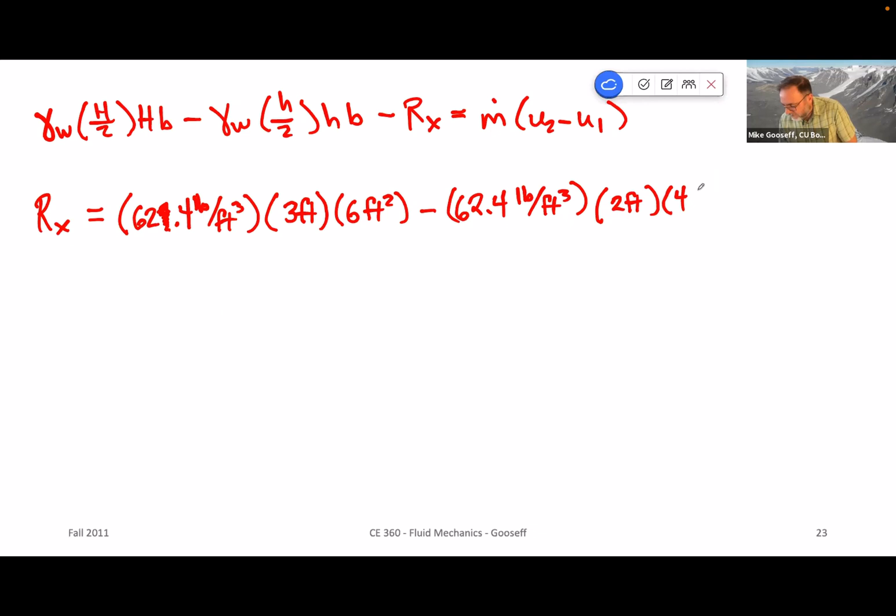And then we subtract this: m dot is going to be 1.94 slugs per cubic foot, multiplied by, working on the upstream end here, rho times A times V. V is 4 feet per second, and A is 6 feet squared. Then we multiply all of that by this difference in U's, 6 feet per second minus 4 feet per second.

When we work all this out, Rx comes out to 531 pounds per foot of width, or per unit width, either way. Okay, 500, and that should be a 3. Sure doesn't look like it. All right, 531.

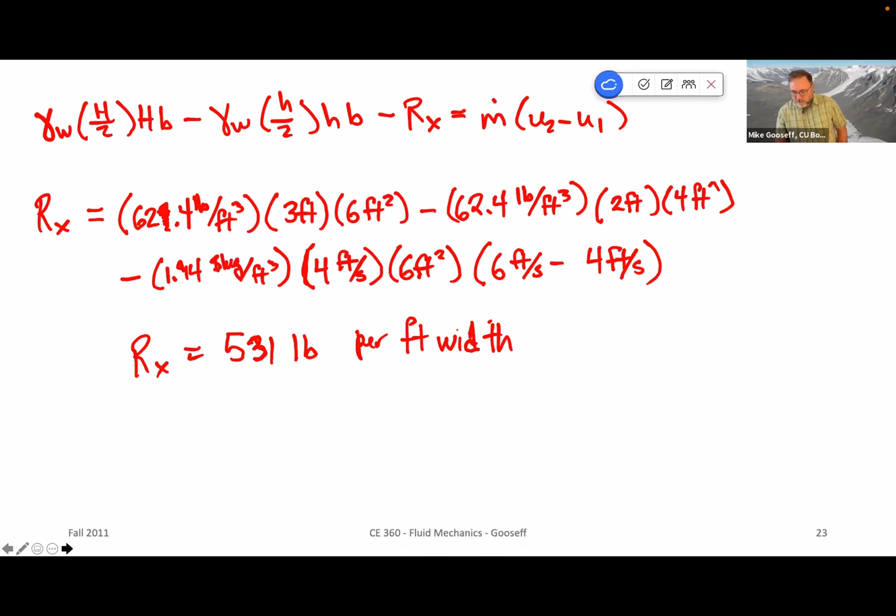Two fluid jets are pointed at surfaces as shown in the figures below. The fluids are incompressible and the effects of gravity can be neglected. The mass flow rate and the velocity of the jets are identical. The cross-sectional area of the jets does not change significantly as the fluid flows. The question here is, how is F1 related to F2? In F1, we have a horizontal F1 force acting in the left-hand direction, and the fluid stream gets deflected up. In the case of F2, it is being curved back around.

So is F1 equal to 2F2? Is F1 greater than 0 and F2 equal to 0? Is F1 equal to F2 over 2? Is F1 equal to 0 and F2 greater than 0? Or is F1 equal to F2?

All right, we're at 45 seconds. One hint I'll give you: F1 and F2 are acting in the horizontal direction.

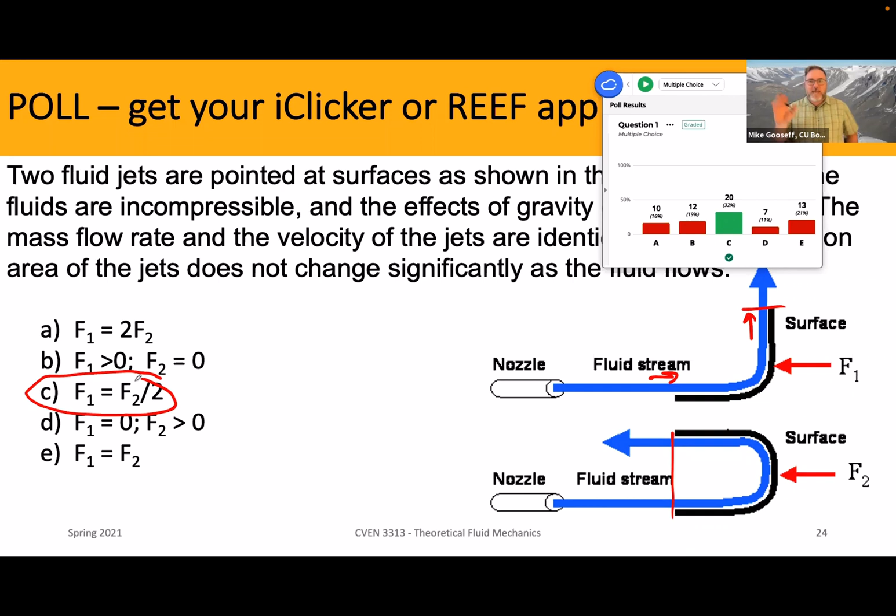Professor? Yeah. I was about to answer the REEF question, but you closed it before I could respond. Is that Ethan? Yeah. Okay, I'll make a note of that, just Ethan Hewitt. Thank you, appreciate it. You bet. Sorry about that. Hi, I just wanted to check, is it going to be kind of the same thing where you're just in the class Zoom during the test and we can come in if...